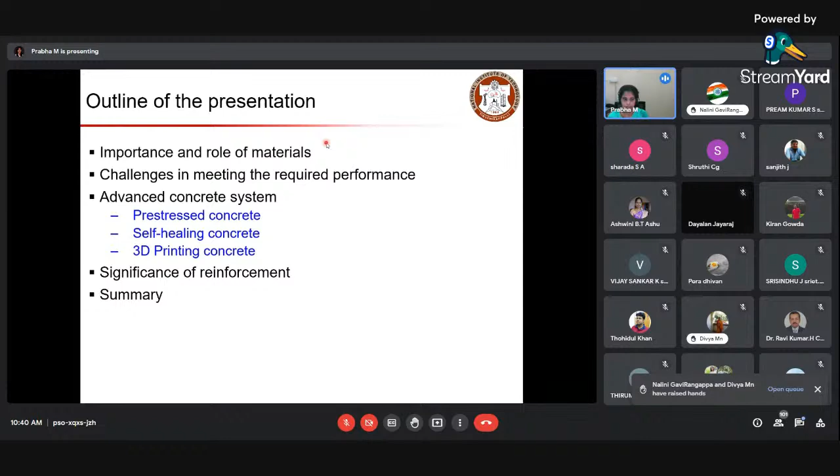Then the significance of reinforcement—how the reinforcement has to be examined, and the importance of the parameters we look for in reinforcement—will be touched, and then the summary of the whole presentation will be given.

In the title slide, I was emphasizing why we need to worry about sustainability, and the role of materials which will help us achieve sustainability.

This summarizes that India is witnessing a huge construction boom. We have a lot of scope for highways, seaports, and airports projects, because we have a huge marine area and sea area, so we need constructions around it. We also have residential and commercial buildings, and urban and rural projects—connecting urban and rural areas is also one of the schemes under this.

So all these things have huge materials involved, and the construction practices that are adapted to enhance the performance of the structure need to be sensitized. We need to keep them safe and usable for longer periods—that basically touches the serviceability of your structure.

We generally construct these structures to serve for 100 plus years. Unfortunately, many structures tend to show early deterioration signs within 10 or 15 years of construction. You might observe some cracks, and if you are not addressing them at the earlier stage, that will cause severe durability issues, which will influence the serviceability of the structure.

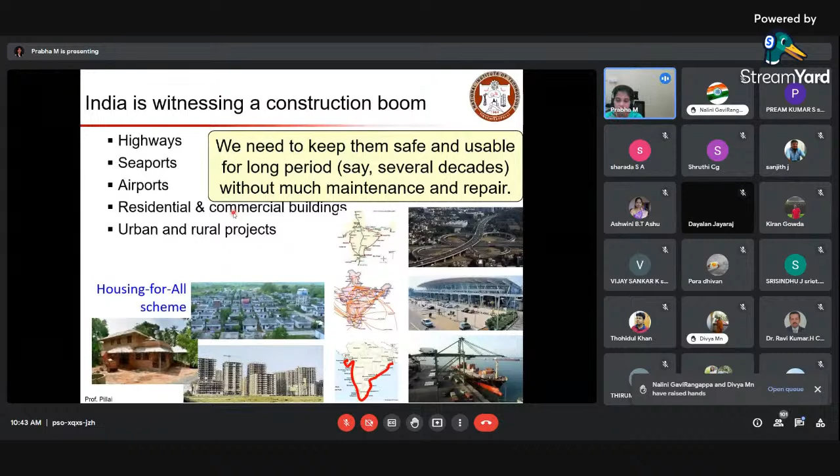That's why whenever we construct structures, we always prefer to do it in such a way that it should not need any maintenance or repair work at frequent cycles.

So what is the scenario today? This data I have sourced from Professor Pillai and Gettu's course content at IIT Madras. It was mentioned that we have surveyed about 1.7 lakh bridges in India, under the program of the Indian Bridge Management System, Ministry of Road Transport and Highways, Government of India. Among that, we found 6,000 bridges are structurally distressed, and many structures are in partially distressed conditions.

But there are a number of bridges which were not accounted for, so this number may become alarmingly high—even more, because the database itself is inadequate and could be incomplete.

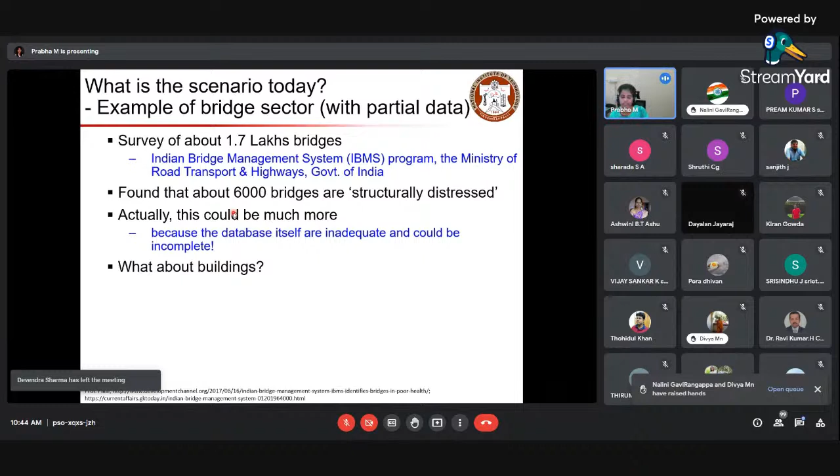If this is the case for bridges, just think about buildings—we really give least importance to the buildings around us. We just construct the building, and after that, unless the owner gives it importance, it will be left as is. So the point to notice is that we have a Herculean task of maintaining existing concrete infrastructure as well as building new ones, with required durability and corrosion resistance in consideration.

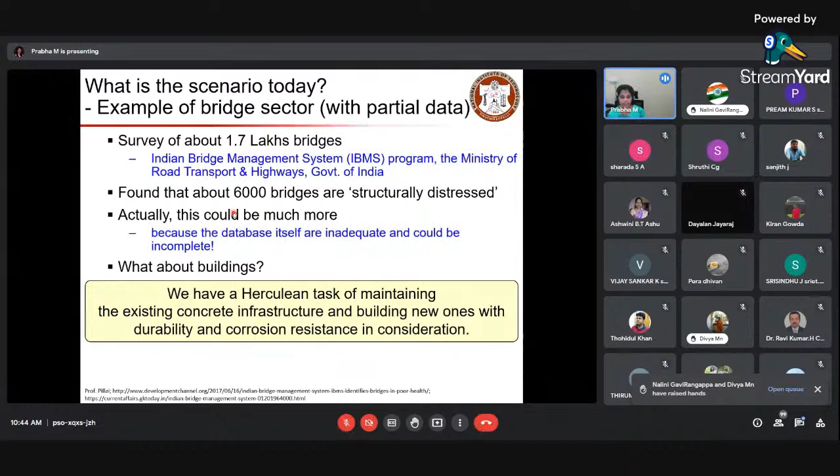Why do I say corrosion resistance? For many durability issues, corrosion plays a huge role in affecting performance. So I'm highlighting here the importance of concrete systems—why do we need to worry about corrosion?

Corrosion consumes a lot of money in concrete structures with steel reinforcement. If you observe a slight crack, that crack allows external or foreign elements to get into the matrix. So if moisture or air increases, that eventually reaches the surface level of the reinforcement. Once the reinforcement is in contact with moisture and air, that reacts and starts initiating corrosion.

So you tend to observe a lot of cracks with stain marks, as you might have observed in many structures. If the crack is there and continues without repair, it goes deeper and deeper to reach the steel surface and starts corroding, and you see a lot of rust formations or stains on the concrete surface.

One report says this costs about 3 to 5 percentage of a nation's GNP in some countries, and it could even be up to 50 percentage of construction budgets. So why do we have such a scenario? Because the existing knowledge is not adequately applied when you do construction work. What we study or theoretically know is not being properly implemented at the construction site.

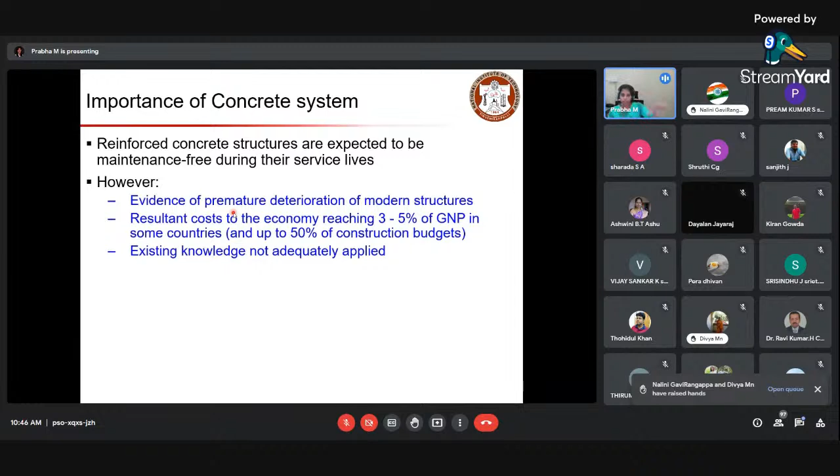So that's why we see this huge gap between what we know about the materials and what actually behaves at the concrete construction site, once the structure is constructed and exposed to various conditions—environmental conditions, loading conditions, or serviceability conditions. Let us look at how different conditions induce problems in reinforced concrete members.

Here you can see a concrete element, and inside you have a rebar. Generally, when we talk about concrete, we divide it into two regions: one is covercrete, the region that protects your steel rebar, and the other is corecrete. Covercrete is responsible for durability, whereas corecrete is responsible for strength.

The purpose of having covercrete is to protect your rebar, and if the quality of covercrete is not adequate, it is not going to serve its purpose. That's why, in general, the code specifies a minimal covercrete depth depending on the environmental condition where your structure is going to be constructed—it could be 25 mm, 30 mm, 40 mm, 50 mm, or even up to 75 mm if the severity is higher.

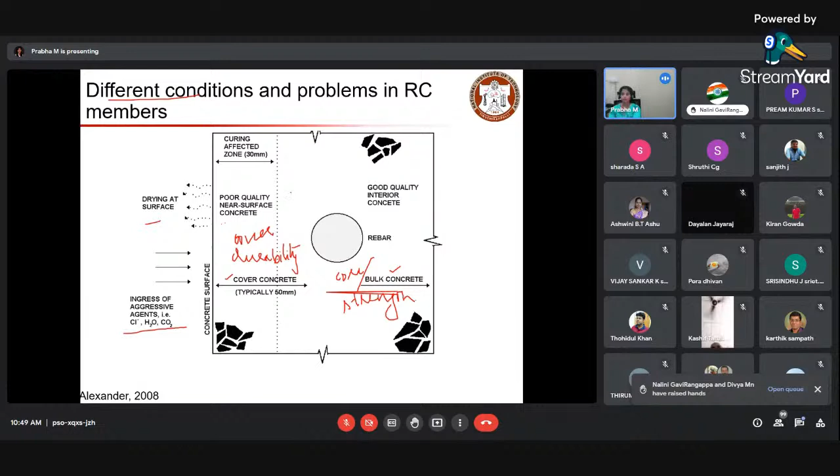So typically you'll have good quality interior concrete, but generally the outer concrete will be of poor nature. So you have to give enough importance to the cover concrete as well to enhance its performance. For sustainable structures, good quality material should be used—the cover concrete should also be of good quality, equal to your corecrete.

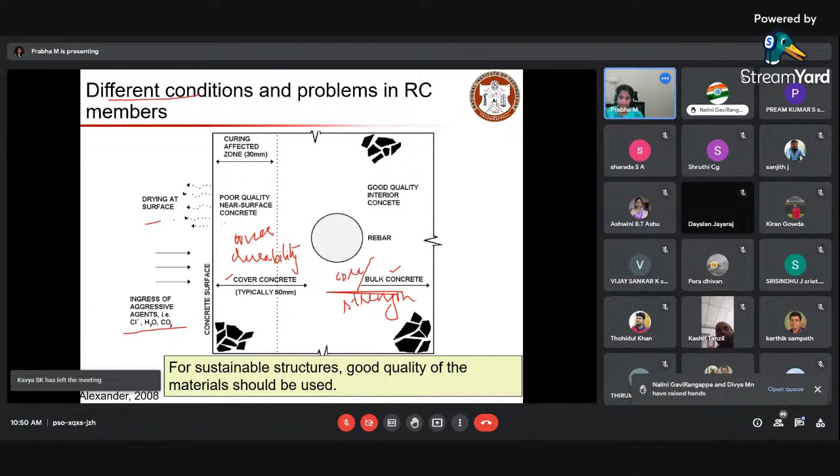So what is the durability that we are talking about? When you have a concrete system, we typically divide concrete systems into two categories: one is about the materials, another is about the process in which it is being made. When you talk about the material, you are aware of how the concrete is prepared. You'll be having a binder type, and some binder content, that could be the cement.

and then it has to be placed.

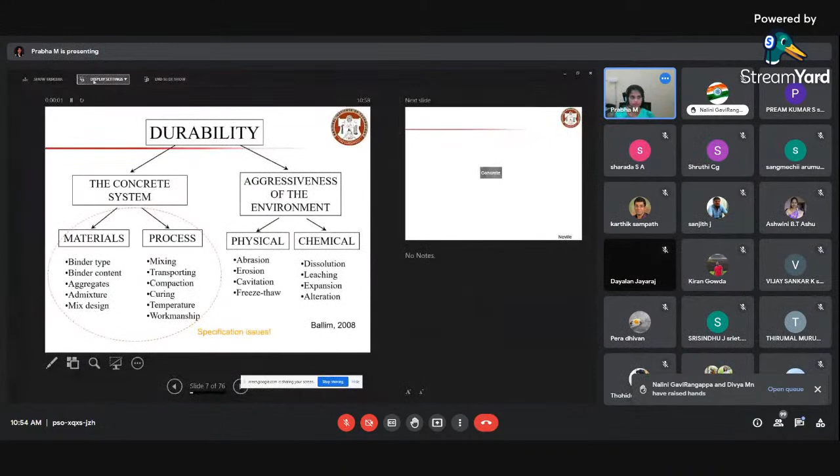So that's all with the concrete systems that we deal with respect to materials or the process. And when we look at the aggressiveness of the environment, we can categorize that into two types: one is with respect to physical attack, another is with respect to chemical attack. When we talk about physical attack, abrasion, erosion, cavitation, or freeze-thaw all influence your concrete. When we talk about chemical attack, this is about what type of chemical is in contact with your concrete and how it reacts with the ingredients in your concrete to lead to damages. This is associated with dissolution, leaching, expansion, alteration.

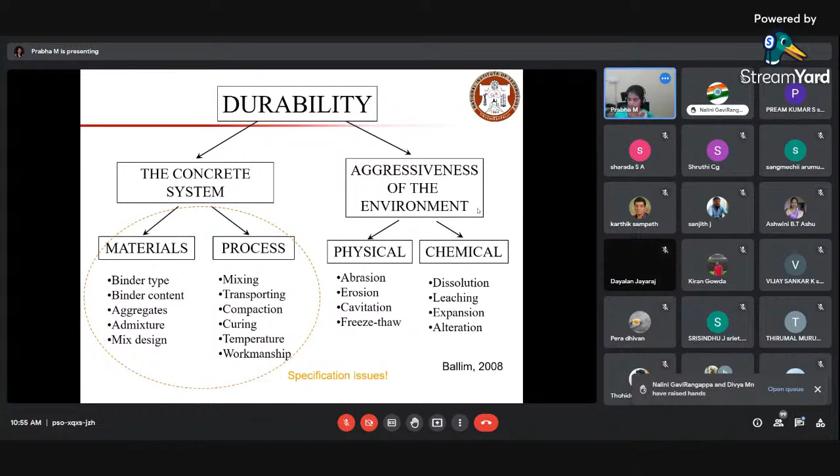Okay, so just to brief in general about concrete systems: you have a concrete, and it's basically a lot of materials combined. It's a highly heterogeneous material. You'll be having cement materials in your concrete, fine aggregates, coarse aggregates, water. So this is not a homogeneous material. You have all the materials put together and bound together by the binder, and thus you'll be having a lot of pores in it. The connected pores are what allow foreign elements to permeate into your concrete.

That is what we call permeability. Permeability basically represents the connectivity between your pores. But you can prepare a concrete without interconnectivity. So the pores can be present in the concrete, but the pore connectivity should not be there. If it is connected, it gives a direct path, so any material can easily penetrate into your concrete.

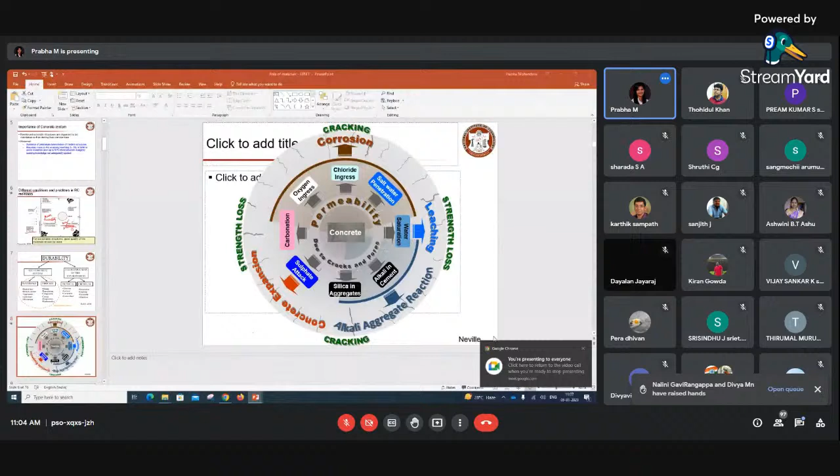So we're talking about concrete, and then the pores and cracks, and how that is going to influence it. You'll be having connected pores that will result in permeability over time. You may observe cracks, and the formation of cracks will further help your pores to get connected.

And if your concrete has good permeability and a lot of cracks and pores, then that is going to eventually allow chloride to ingress, oxygen to ingress, and salt water penetration. You may see carbonation leading to a carbonation reaction, and then water saturation would occur, and that will result in leaching.

In general, your concrete itself has some amount of alkali in cement and silica in aggregates, and depending on the exposure with respect to sulfate environment, if the sulfate already in your concrete is not reacting when it has to react, then over time, especially when you are in steam curing—this is a scenario when the temperature is above 80 degrees Celsius—you are basically suppressing the sulfate reaction in the initial stage, and that is going to react at a later stage and result in delayed ettringite formation.

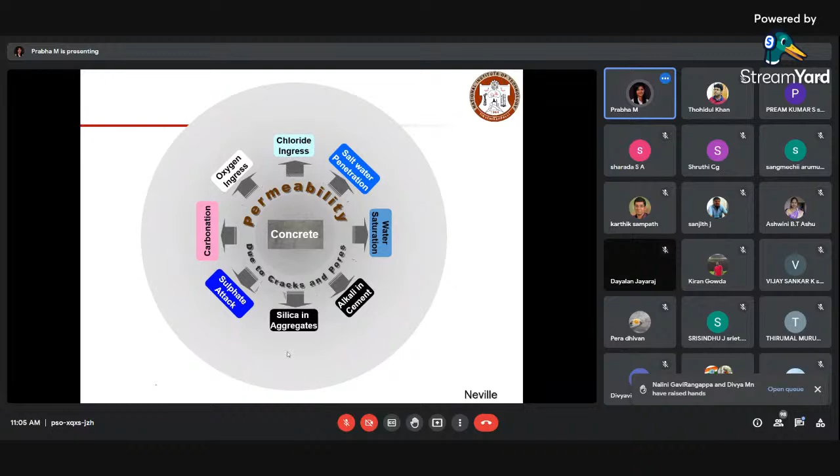So when you have such combinations of oxygen ingress and saltwater penetration, or sometimes even carbonation, that is going to result in corrosion. Or when you have the combination of water, alkali in cement, and silica in aggregate in contact, that is going to result in alkali aggregate reaction.

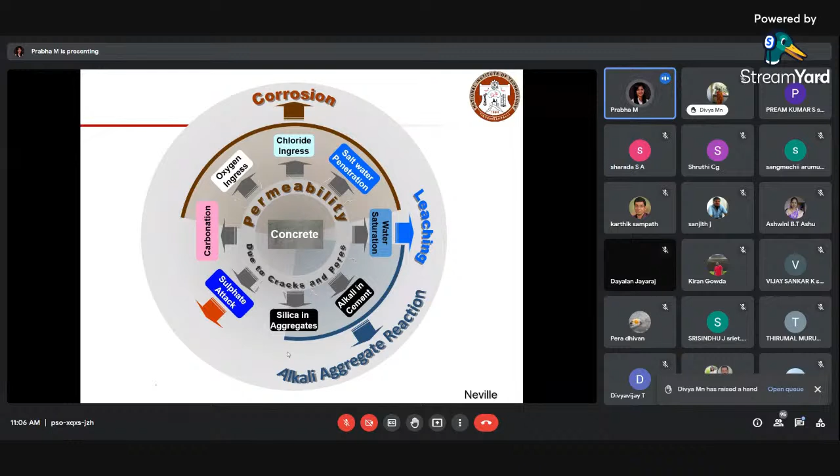And if you have only water saturation, or sometimes these could occur in combination together, you may have leaching, and if you have sulfate attack, that is basically going to result in concrete expansion, and thus going to crack your cover concrete.

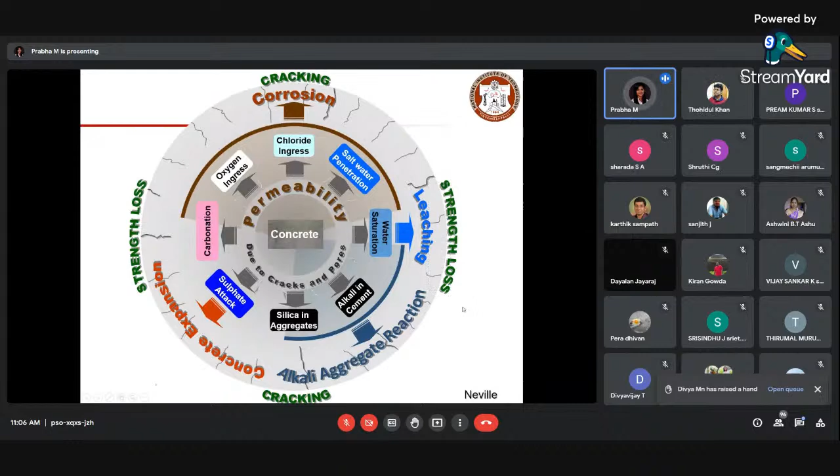So what is going to occur if it is cracking? All this reaction is basically involved with expansion of your concrete material, and that is going to result in cracking, and you may lose the strength that it has to provide. So these are some common observations that we have with respect to the materials in concrete systems.

Then let me talk about the common causes of deterioration of concrete. What are the causes that would result in such a scenario? You may have, as I was telling, sulfate attack, or physical or chemical attacks in the form of abrasion or erosion.

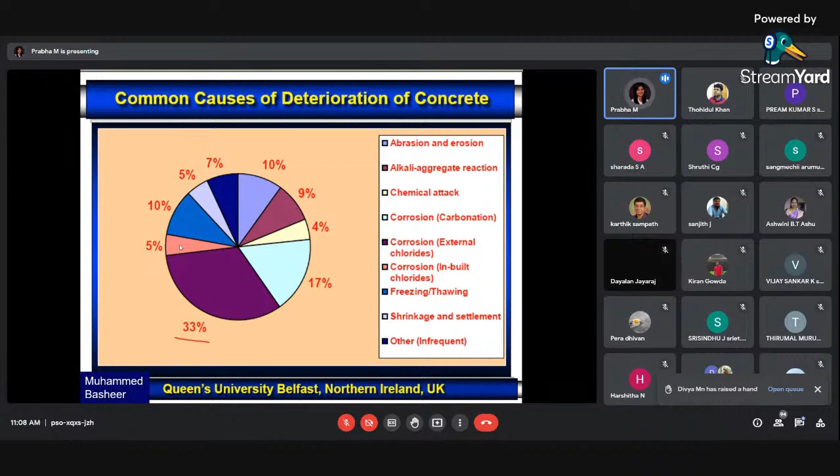The importance of the covercrete—if you're not providing a sufficient amount of covercrete, then that may result in low cover, and you will be having poor quality concrete, which accounts for about 26 percent.

It's significantly high. And then poor design detailing, where the steel reinforcement plays a huge role. Why do we use steel reinforcement? Because your concrete is good in compression but poor in tension. So we place the steel to help your concrete. The steel says, okay, you can stay cool, I can take some tension that is going to come. So that's how they work together.

So that's why we provide steel. But if that steel detailing is not adequate enough and doesn't meet the required purpose, the poor detailing would affect the concrete performance. And then poor workmanship, as I already explained how it is being done in the country.

Wrong specifications, of course. Sometimes the codal practices that we have were developed in the 1960s or 70s, and we still use the same codal practices with updated versions, but there is no much change in the specifications or the methods specified in the code. Why? Because the code specifications developed in the 1960s were meant to meet the requirements for the materials available in that scenario, in that period.

But now we have huge modern construction materials with significantly high strength parameters and other requirements. So in the same scenario, if we still use the specifications developed in the 1960s or 70s, that is not going to help. We may think that could be conservative, but the over-estimation again influences the performance in various aspects.

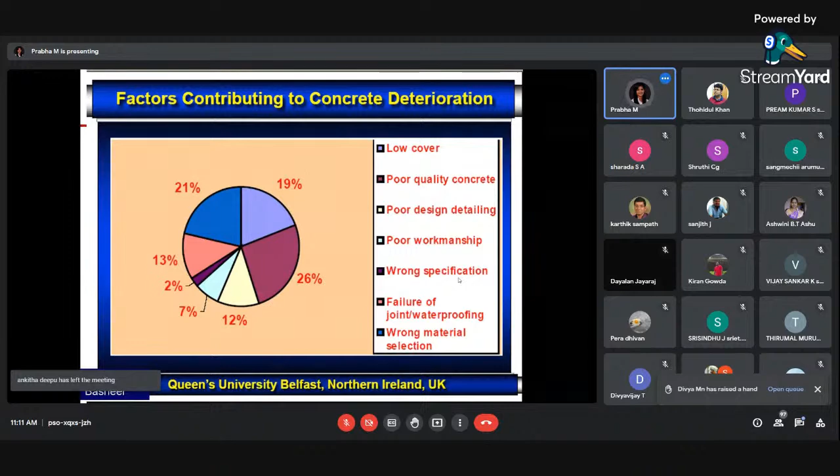Wrong material choice is another issue. If you are asked to select a material, you have to choose it so that it meets the required demand. You need to know the material well, and whether it's adequate for the application or whether there are specifically designed advanced materials for that particular demand. If you use the right one, your design becomes more conservative with less effect. I'll touch upon these aspects as we move on.

This is the basic thing I'll be covering in this presentation. The balanced approach is what we look for, especially to enhance service life. Balanced approach means giving equal importance to steel and concrete, because steel helps take tension and concrete helps take compression. But what protects your steel is the covercrete, and we give the least importance to that. The point is that to protect your steel, you also need to give importance to the covercrete—you need to balance the quality of both, and the importance of both.

So steel with enhanced resistance against corrosion is the main thing to enhance serviceability. Similarly, concrete cover with enhanced resistance against ingress of deleterious elements is the other factor that will balance your synergetic effects to enhance the service life of the structure.

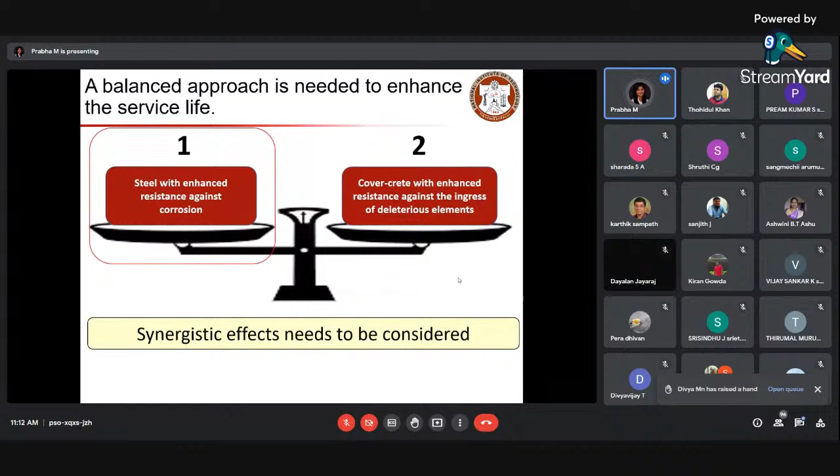So why is concrete a vital material for any construction? You may think of replacements for many things, but we don't have any replacement for concrete till now. Why is it such a vital member for any construction?

To highlight the importance of concrete, I brought a few plots from Zhang et al. He noted that the annual production of concrete is significant tons per year, and the price is also very low compared to other materials like metals, ceramics, or polymers—steel, wood, bricks, and masonry. Your concrete lies somewhere here: production is high, cost is low. We still haven't come up with an alternative that serves the purpose better than concrete, with respect to both performance and cost.

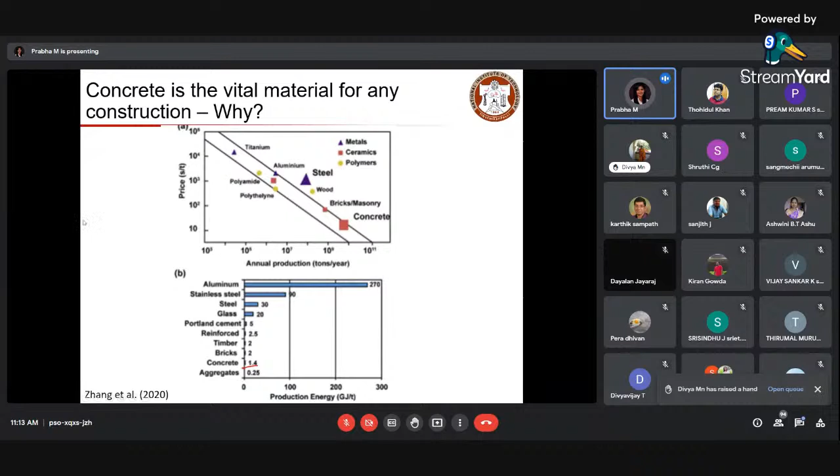Next, consider the energy involved—when we talk about sustainability, we talk about energy. The production energy involved in concrete is also very low compared to other materials. Here you can see the energy involved in various materials ranging from aluminum to aggregates. Concrete comes in around the range of 1.4 gigajoules per ton, so the energy invested in preparing concrete is very low compared to other materials. That's why concrete is such a vital material for any construction.

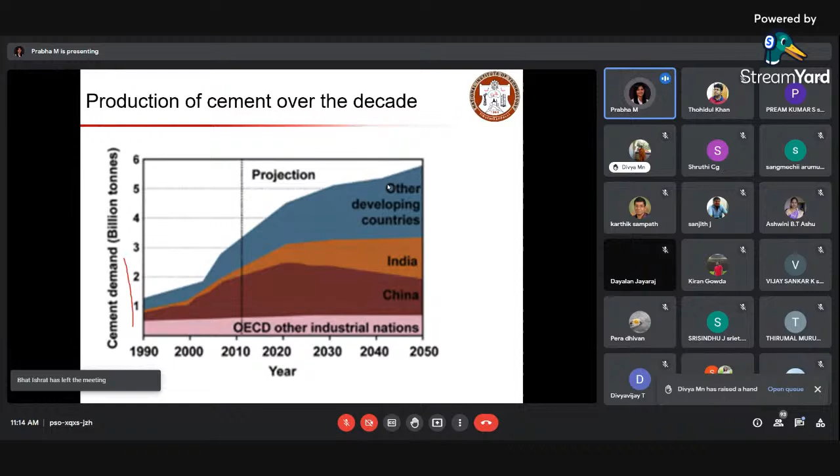This shows how cement production has evolved over the decades, ranging from the 1990s to 2050, with predictions for various countries—especially developed and developing countries—focusing on India and China, which have tremendous infrastructure growth coming. Cement demand in billions of tons is going to be very significantly high in India and China, with the quantity of these two almost equal to or greater than the quantity required in other developing countries combined. This sensitizes us to give more importance to the sustainability aspect. When producing such huge amounts of cement, we also need to find ways to save energy to meet a circular economy.

So concrete is the second highest consumed material. Why? Because it gives the desired properties for good performance in terms of workability. Workability deals with how much water you add for the required strength, and how admixtures can be helpful for enhancing the flowability of your mixture if the water content is less, especially for high strength concrete.

So you may reduce the water content significantly. As the water content reduces, the concrete mix becomes too harsh. So chemical admixtures will help you achieve the flowability.

And then compressive strength. So how do we ensure the compressive strength? By pore volumes. As the pore volume is lesser, you will be having a denser structure, thus resulting in more compressive strength.

And when you talk about durability, that is governed by the connectivity between your pores. If the pores are connected, you will be having less durable material. If the pores are less connected, though the pore volume is more, but if you don't have the connectivity, then you will be achieving good durability.

And then dimensional stability. That is something we look at when you have huge surface area. Why? Because when those concretes are exposed to environmental conditions, the humidity and temperature in the atmosphere will influence the performance in terms of shrinkage and that mechanism. So when the material is exposed in such a way, it should not lose its dimensional stability.

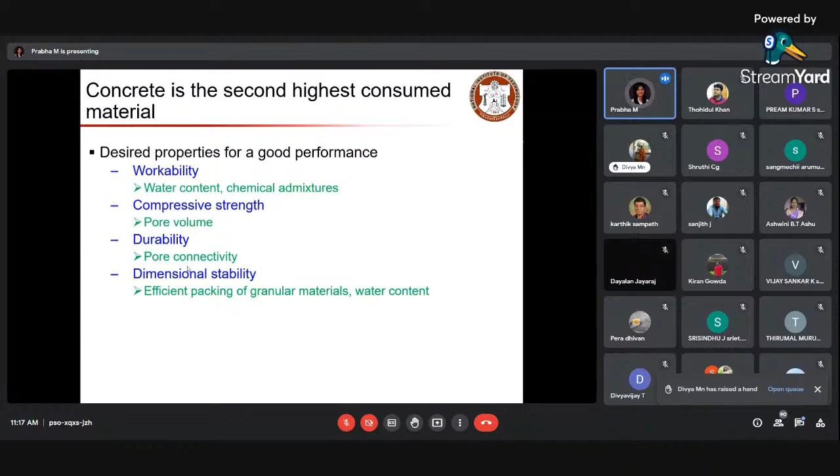So when I talk about typical concrete systems we use in developing infrastructure, we'll have normal concrete, which is normal strength concrete, high performance concrete, ultra high performance concrete, precast concrete, and the latest technologies like self healing concrete and 3D printing concrete.

Why do we have self healing concrete? Because that is in respect to maintenance and repair work. Cracking is inevitable in your concrete. So if it gets cracked, we are making the concrete self sustainable so that it can heal on its own by providing some products that would fill up the cracks that develop, and then it can be healed on its own by filling the cracks.

And then 3D printing concrete - we don't need to wait for the concrete to be mixed and placed and wait for the strength gain. It's all about you pour the material and it will be printed to the required dimensions. So a lot of research is ongoing focusing on these topics.

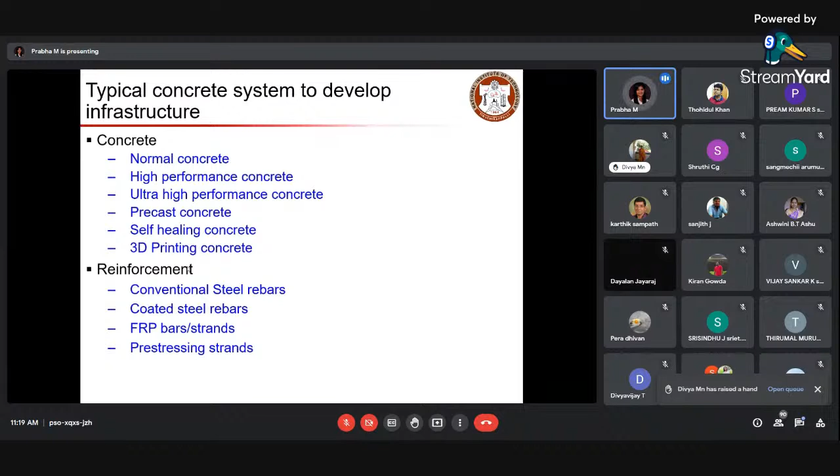And then reinforcement - when we talk about reinforcement, we'll have conventional steel rebars and then coated steel rebars. Then you have FRP bars in strands and pre-stressing strands, right?

So I'm not talking about normal concrete, but about the materials that we use. I'll just directly get into high performance concrete. When we talk about high performance concrete, we'll be using some supplementary cementitious materials which will help us to

enhance the strength as well as the durability. We use such materials to help densely pack the aggregates, so that there is something called pozzolanic reactivity, pozzolanic reaction. These materials in general have some reactive silica or alumina, so that when they get in contact with calcium hydroxide in the presence of water, that produces additional CSH gel. That CSH gel will help enhance the strength, and that product will help fill up the additional pores. And the fine materials of these SCMs will also act as fillers

so that your matrix will be much denser. That's why the dense packing of aggregates will be achieved, and low water cement ratio can be used for meeting the high performance concrete requirements, and proper curing needs to be done. Proper curing is needed to avoid early cracking due to shrinkage and thermal stresses.

Here you can see various types of SCMs listed: fly ash, GGBS, rice husk ash, silica fume, metakaolin, and fine POFA material.

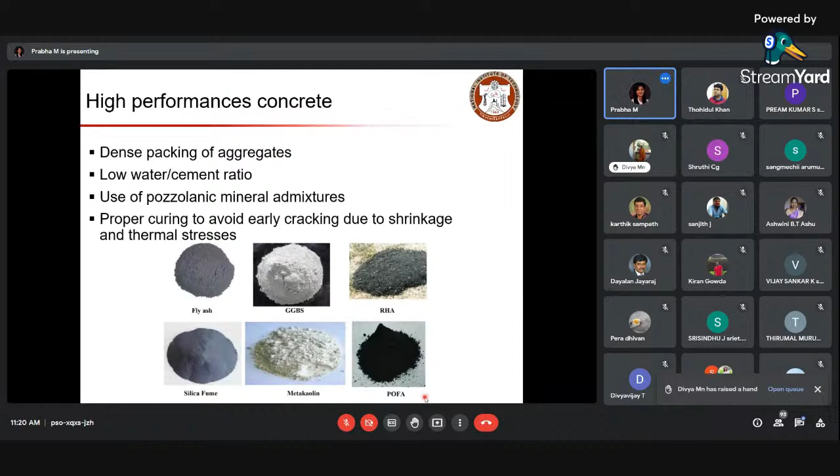When you talk about ultra high performance concrete, here you are limiting the coarse aggregate, so coarse aggregate will be very less. The size of the coarse aggregate is limited, so it becomes too fine a material.

So ultra high performance concrete is defined as a cementitious based composite material with discontinuous fiber reinforcement, and generally the compressive strength of the material will be above 120 MPa, and it will have pre and post cracking tensile strength of above 10 MPa, and this will also help enhance the durability. You can see some steel fibers used for this purpose.

You can see the ultra high performance concrete shown here. You will be having some cement and pozzolans, and you can have some fine aggregates, fine sand, ground quartz and fibers. High range water reducer is required because you're talking about 120 MPa, that means the water cement ratio will be very less, and you'll have some fibers also.

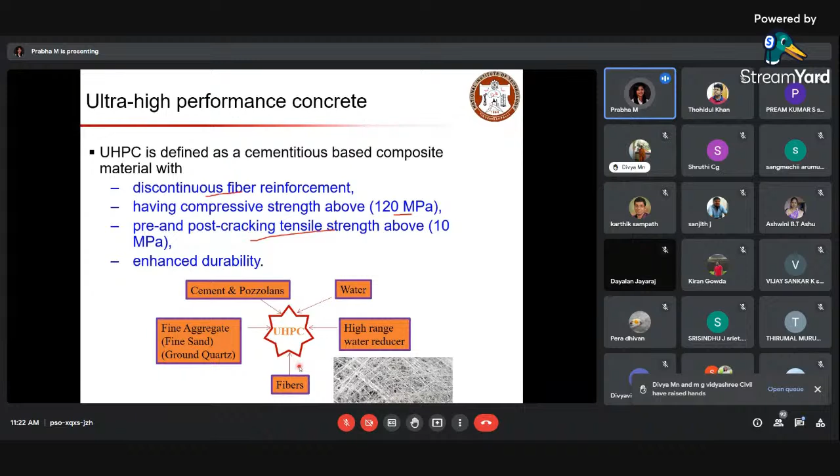So in case if there is any cracking, these fibers will help enhance the toughness of the material. Why? When we go with this 120 MPa strength, basically you are making a material which is very brittle. So when you have brittle material, the failure will be sudden. To enhance the toughness or the energy absorption of the material before it fails, we will be adding some amount of fibers. That's why we use fibers to enhance its durability.

When you talk about the performance of ultra high performance concrete, you can see this is a control mix, and you have a high performance concrete in the range of 80 MPa, and this is about 200 MPa. The compressive strength is significantly high for this RPC, basically indicating reactive powder concrete, which is one form of this ultra high performance concrete.

The fracture toughness is also significantly high. When we check the application of this high performance concrete for abrasive wear, because it has very good strength and toughness, the abrasive wear will be about 2.5 times lower than conventional concrete. And water absorption, because these are finer materials, the pores will be very less and you have a denser matrix, so the water absorption will be 7 times lower, and rate of corrosion will be 8 times lower, and chloride ion diffusion will be about 25 times lower than conventional concrete.

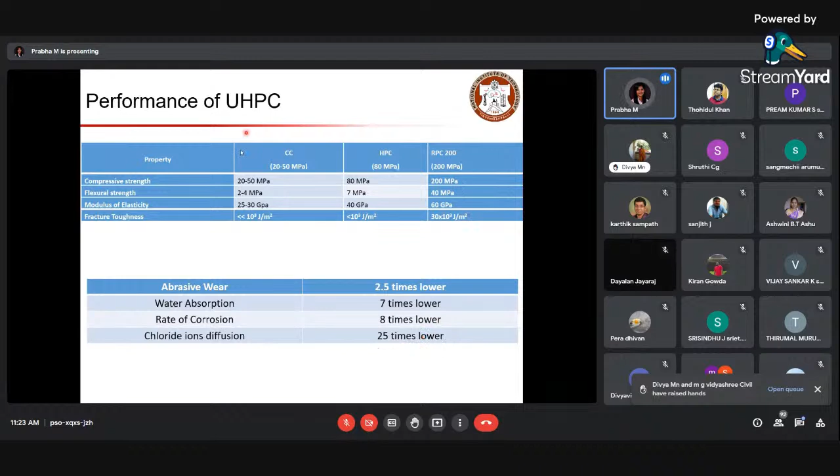When we work with fiber reinforced concrete, we check how much the material can absorb before it fails, because concrete is a quasi brittle material. It cannot absorb as much energy before failure as steel. Steel tends to bend and deform, but as the strength of concrete increases, it becomes too brittle, like glass, and failure will occur suddenly. We don't want sudden failure, so we add fibers to enhance the toughness of the material.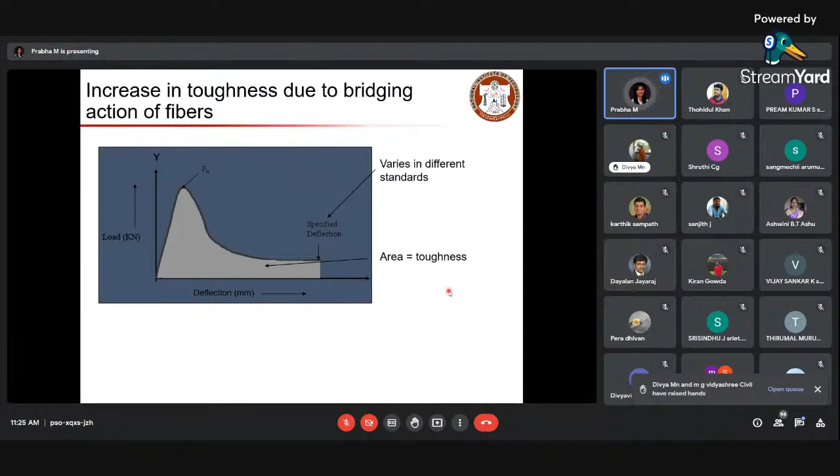And then we have self healing concrete. As the name indicates, it's a self-repairing concrete, a concrete composite with the ability to repair small cracks automatically without any external intervention.

How does this mechanism occur? It is autogeneous healing, through further hydration of unhydrated cement in the concrete. The concrete has cement, moisture, and aggregates. When we have concrete, it doesn't mean all the cement has hydrated - there will be some unhydrated cement present.

That unhydrated cement could get accessible as a crack occurs. If it gets in contact with moisture or some triggering agent, it reacts and produces additional CSH to fill up the cracks. So hydration of unhydrated cement in concrete helps achieve healing.

Mineral admixtures, fibers, nanofillers, and curing agents are such helping agents for you to achieve this autogeneous healing.

The second one is autonomous healing - a trigger that is required to activate this process. For autogeneous healing, you don't need to do anything; as long as you have a mineral admixture, fibers, or curing agents, once it cracks, that reacts and fills up the gap.

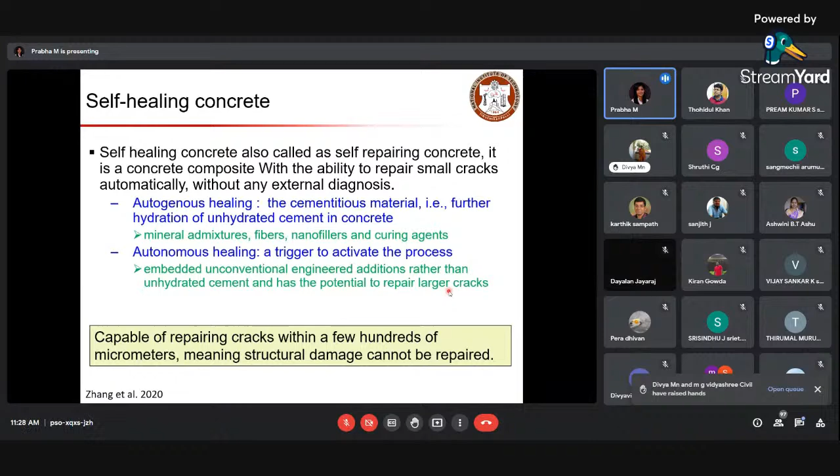Especially issues related to durability, exposure conditions, and so on. If you have structural damage with huge or wide cracks, this is not going to help you. As long as the crack width is minimal and narrow, this kind of material will help prevent such cracks from growing further and enhance resistance to crack width propagation.

Here you can see the mechanism of autogeneous healing. You have a concrete structure with a crack - this could be a physical cause like swelling, a chemical cause like continued hydration or calcium carbonate formation, or mechanical causes where you have fine particles and broken pieces, as you can see here in the water.

These broken pieces result from mechanical causes, and then chemical causes continue the hydration, leading to swelling, which helps bridge or fill the gap.

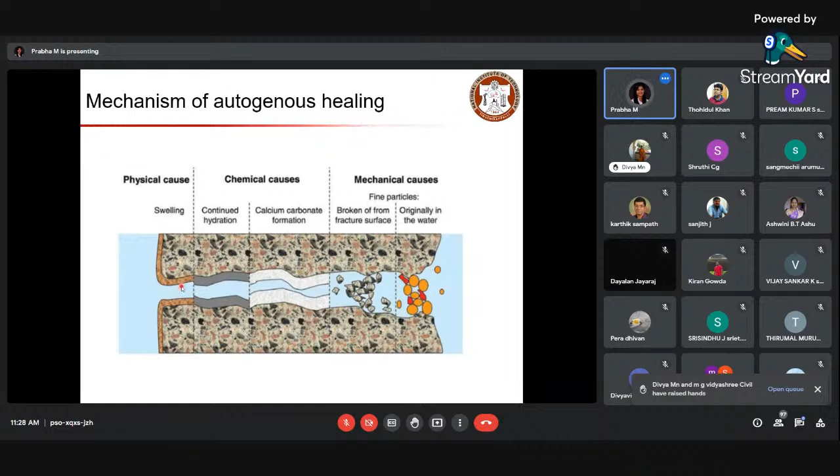Here you can see the performance of healing materials in self-healing concrete. You have a concrete with mineral admixtures, and here you can see the crack after damage is induced.

Now you have expansive agents to fill up the gaps in the form of geomaterials that will swell and fill the gaps, or carbonate precipitates. When water fills this, the carbonate precipitates will fill the cracks. So after filling, the expansive gel agents, geomaterials, and carbonates eventually fill the cracks. Here they've started to react, and you can see the filled cracks.

Looking at the images in longitudinal view, you can see damaged ECC with crack widths less than 60 micrometers, all healed by the healing products, which filled the gaps or cracks when exposed to water or air.

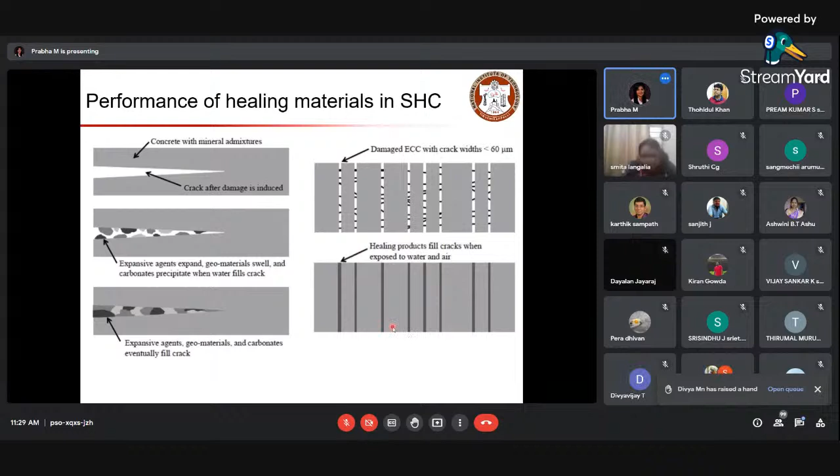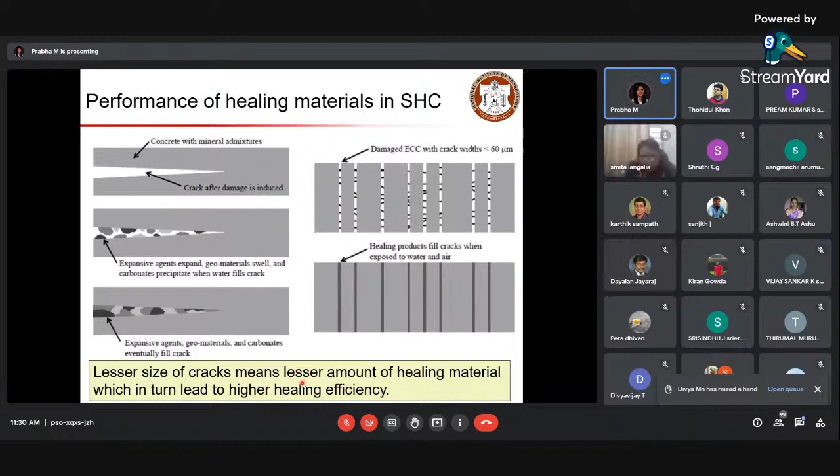So lesser size of cracks means lesser amount of healing materials, which leads to higher healing efficiency. That's why this is not appropriate for structural cracks. If the crack width is in the initial stage, this type of material will help enhance the performance at the early stage of your structure itself.

Next we have something called 3D printing concrete. I don't know how many of you know about Tvasta. It's a startup by IIT Madras, under the IIT Madras company. They are doing enormous work on 3D printing concrete, and recently they inaugurated a 3D printing tower constructed by them.

This technology was all developed in the 1980s. Stereolithography and fused deposition prevailed over the 1980s, but was not popular for the construction industry. This was developed for stereolithography, and in the medical field they started using it. The pioneering work by Khoshnevis et al., called contour crafting, revealed the potential of additive manufacturing technology in the construction field in the late 1990s, early 2000s.

The most popular method is extrusion-based 3D printing, where cementitious materials are deposited as continuous filament layers through a nozzle. You have a nozzle with all the cementitious composite in it, and then you just print it. That's how it was started.

In 2014, Winsun, a Chinese construction company, printed two-story buildings successfully. Then it got attention across the globe, and a lot of research groups started working on it.

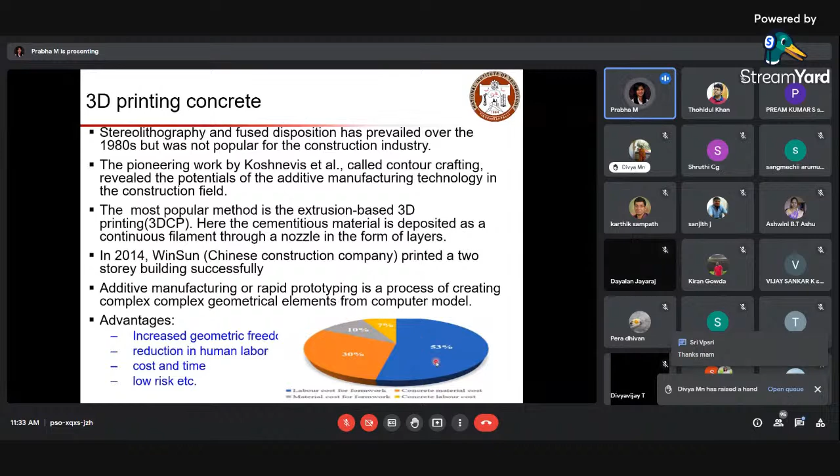So you can see the amount of cost we invest in labor, material cost, concrete material cost, and concrete labor cost. About 53 plus 7, or about 60 percent, is labor cost, and the rest 40 percent is concrete and material cost for the formwork. The material cost for the formwork is about 10 percent. So we can cut down the price significantly, up to 70%, when we go with 3D printing concrete.

How does it work — the material behavior? When you look at the material behavior, you basically work with the rheological property of the concrete. Your concrete has to be as flowable as possible, but once placed, it should have stability. Care should be given so the flowability stays as it is, with proper stability once placed in position.

Research has shown a correlation between pumping behavior and rheological properties through the Kaplan model. The pumping behavior of concrete also depends on the discharge rate — at what rate you discharge your material from the nozzle to print the required shape — and the pipe diameter and length of the pipe hose. These all govern the stability of the process.

But once the fresh concrete reaches the nozzle head, it contracts due to the nozzle's shape and size, and then a layer is deposited one after another over the previous one until the desired shape occurs.

So it is not a complete shape in one go. It is like you will be moving layer by layer. I will show an image of such 3D printed concrete structures to show how it looks, and then you need to do some surface finishing to enhance its aesthetic look further.

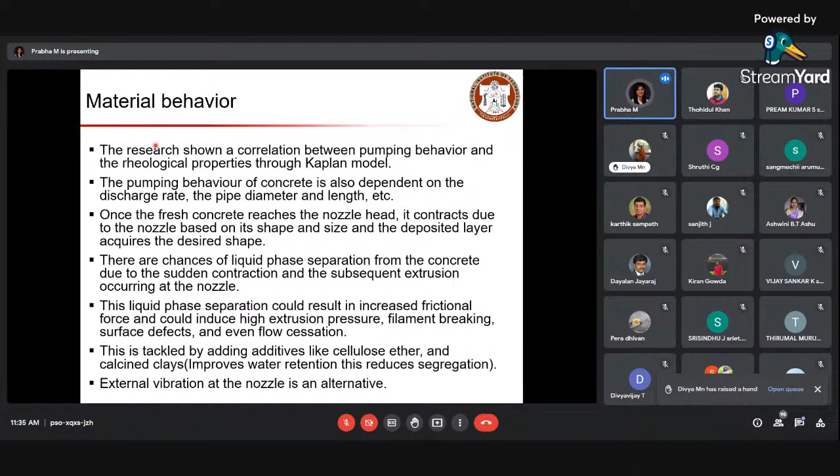You need to look at the importance of yield stress and viscosity, which should be low during pumping, while immediately after deposition the yield stress should be of higher magnitude. So it is a paradox - while pumping, yield stress and viscosity have to be lower so it can be easily moved or placed, but after placing, the same properties should be enhanced so it can maintain its stability. This is achieved by additives and nozzles which can cause an increase in yield.

So what do you do? In the pump, you make the material have lower yield stress, and when it is coming out from the nozzle, you add additives which help increase the yield stress and elastic modulus. You can also have accelerators like calcium sulfoaluminate cement, and thixotropic agents like nanoclay, which may increase the rate of structural buildup through an increase in the flocculation of cement grains. These additives help enhance the rate of structural buildup, which helps increase the buildability or placement of your layers.

The most common method for assessing extrudability is based on printing a filament layer of a given length and then visually examining for signs of blockage, tears, or discontinuity. This means you'll have layers placed one over the other, and you visually examine that the layers are being placed properly, or if there are any signs of tears or damage while it is being placed.

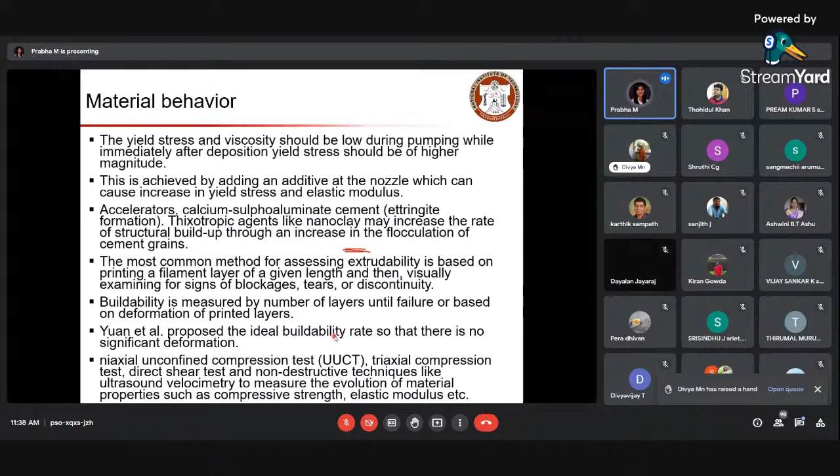So overall, this is a promising technology for the future, and it helps you achieve any dimensional requirements, and it helps you cut down the construction cost by 30 percentage when it is being successfully implemented. So that's all with the concrete.

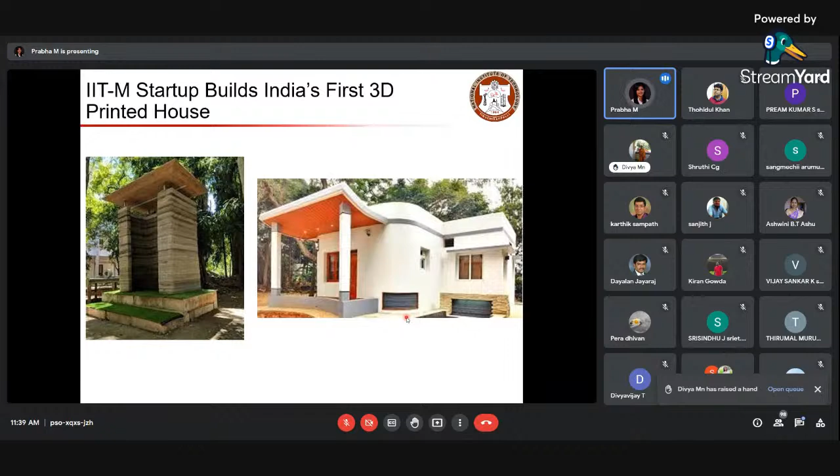I'll just quickly touch upon the aspects we look for in the reinforcement. When we talk about reinforcement, we mostly deal with TMT bars. Initially we were working with mild steel, and then we evolved to CTD bars because the strength offered by mild steel, Fe 250, is not adequate, so we raised our bar to CTD bars where you can enhance the yield stress beyond 450 or 500.

But later we observed that CTD bars are not adequate enough for meeting the durability performance, because CTD bar, as the name indicates, has twisted bars, and that will have high reactivity, and when it gets a chance, it reacts faster and results in early corrosion. That's why nowadays we don't have CTD bars as common as TMT bars.

So the name indicates it is being thermomechanically treated, or you can say quenched and self-tempered, QST bars. You can see here the process of TMT bar manufacturing. The surface will be ferrite, sorry, the surface will become martensite and core will be austenite. Once it is taken to the quenching box, initially the temperature will be very high, in the range of about 1000 degrees Celsius, and it will be quenched. So when it is quenched, the outer surface becomes martensite, while the inner surface remains in austenite mode.

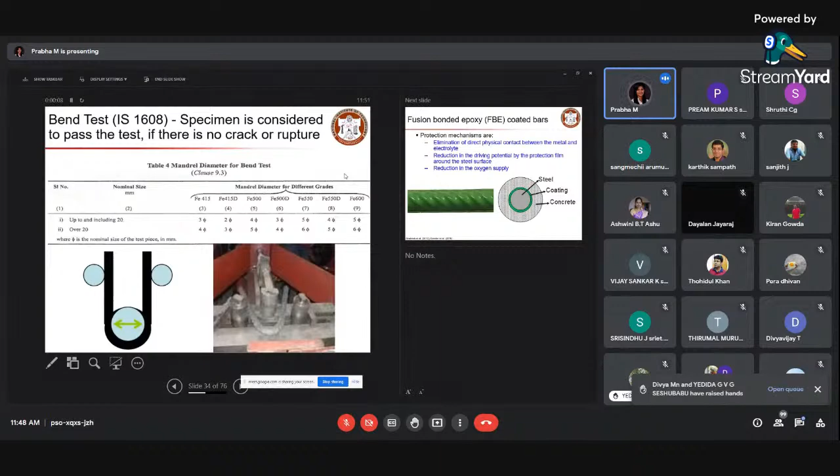So here you can see the bend test, specified by IS 1608. You have a mandrel diameter to bend your rebar and see where it is going to crack or not.

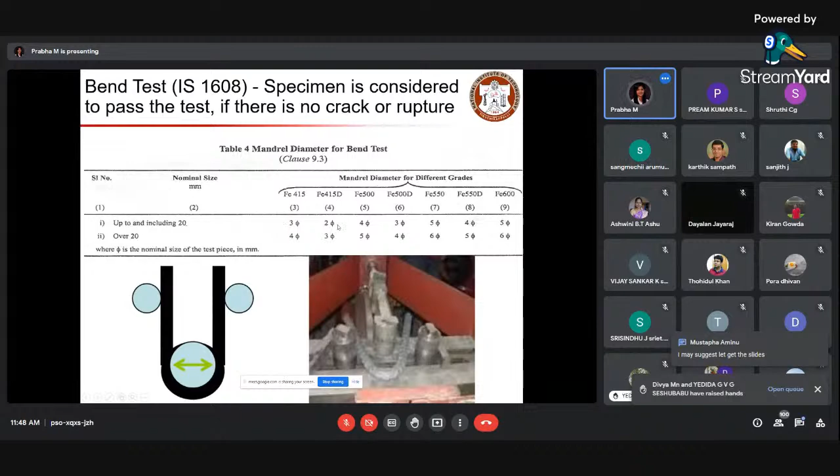That is with respect to conventional reinforcement. To enhance the corrosion properties, we also have fusion bonded epoxy coated bars. As the name indicates, epoxy will be coated on top of your steel rebar, and when you place the rebar in the concrete, this is how it looks - you have your steel, then the coating, and then your surrounding concrete material.

So what is the protection mechanism here? The assumption is that when you coat your steel, you're eliminating the direct contact between the metal and the electrolyte. The coating reduces the driving potential that induces corrosion, and it reduces the oxygen supply also. But if the coating is not done properly, the scenario is going to worsen.

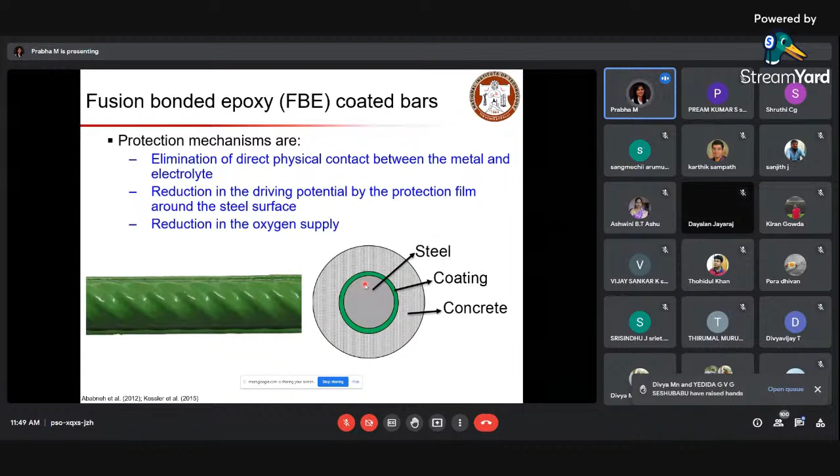You can see the process of FBE coated rebars. First you have the plain rebars, which are surface cleaned, then you prepare the surface for epoxy coating. The epoxy resin powder is placed on the steel surface, then you water quench it, resulting in thermosetting polymers. Then you inspect for holidays or damages, and allow the material to go.

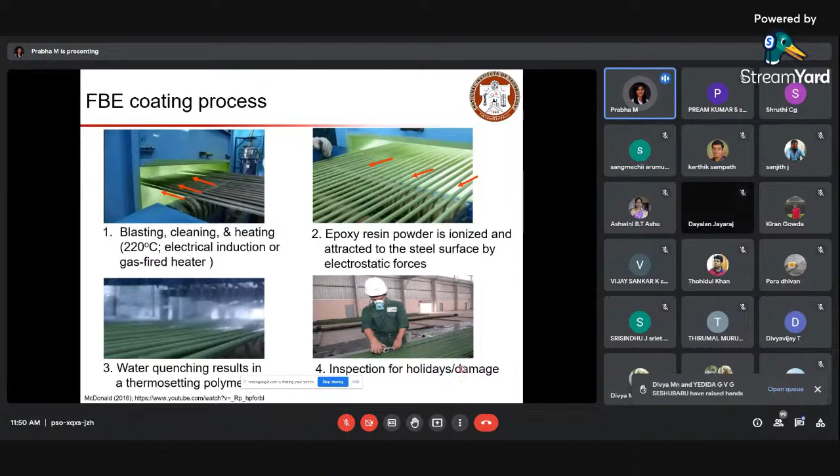So what are holidays and pinholes? If the coating is not done properly, and there are pinholes present, that is what we call a holiday. We check with wet sponges and wires to see whether your material has pinholes or holidays.

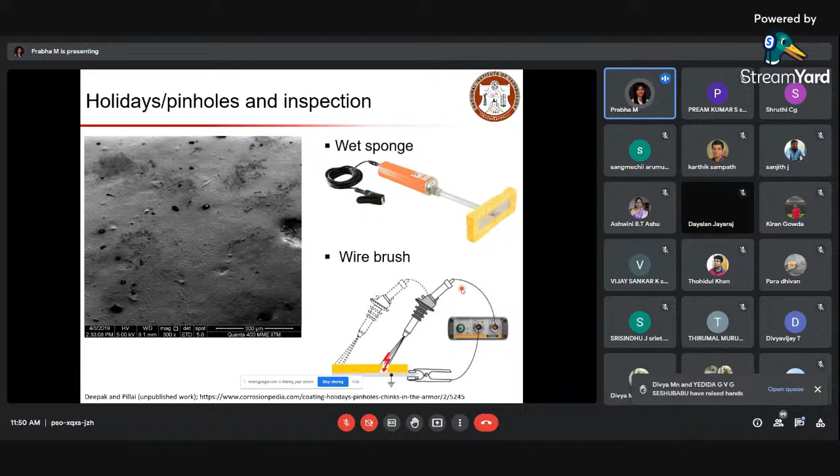You can see here it will get in, and that indicates the issue - the potential will also be higher when you have pinholes, resulting in a higher corrosion rate compared to your conventional concrete.

So the additional insight, how do we do it? Typically, when dealing with epoxy coated rebars, once coated, it should not be bent. But unfortunately, at these sites, they bend it for preparing stirrups. So in other developed countries, how do they do it?

They bend the bars first if the piece has to be used as a stirrup, and then they coat it, so that the coating will not be damaged when it has to be used as a stirrup. So the rebar should not be cut at the site, nor should it be bent at the site.

Even if it is cut or bent, you could just pour additional coating to fix it, but this is not going to serve the purpose, and it will worsen. As the thickness increases, the coating efficiency becomes less, and that may deteriorate, leading to other damages.

You can see here the fusion bonding will not occur at ambient temperature conditions, and this should not be cut at the site - it has to be thoroughly checked for any surface damages.

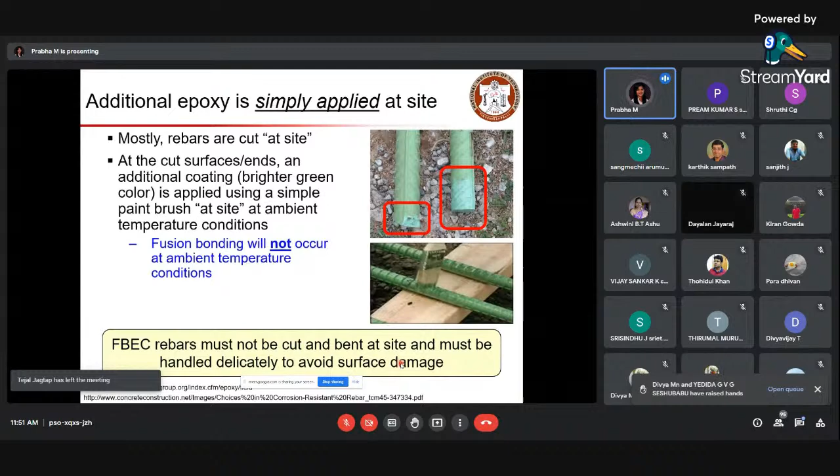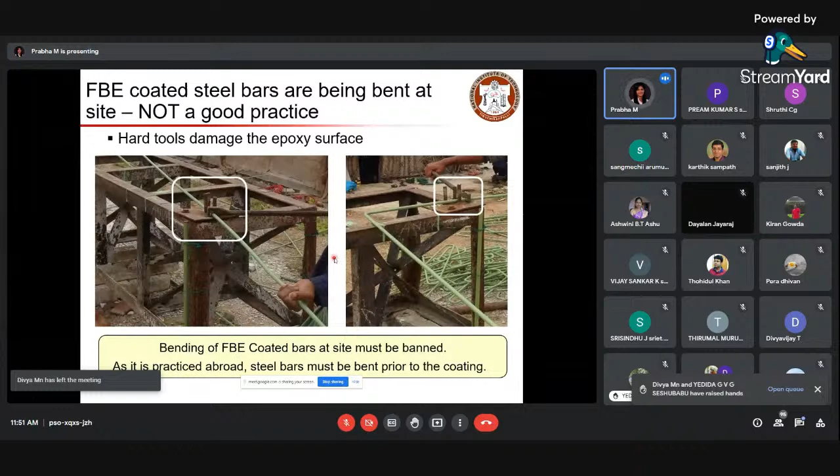Here is an example where you can see such rebars being cut and bent at the site, and while it is being done, the coating gets damaged. You can see here the coating got damaged, and a lot of cracks were observed on top of the coating.

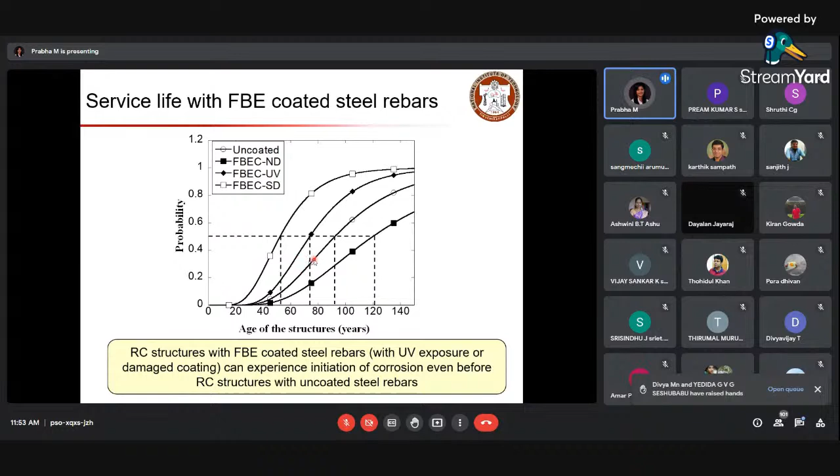This will help enhance the service life of about 120 years. Whereas if you look at the ultraviolet or surface damage case, the probability of failure is very high compared to your conventional concrete systems. So if you take good care of the coating, this technology will be helpful to enhance the service life. If not, this will worsen the performance of your structure by increasing the probability of failure, thus reducing the serviceability of your structure.

You can see the premature corrosion observed in such cases due to moisture attack, without even chlorides. You can see there is no coating at all. The coating has come out, and you can see how severe the corrosion is at this place. So it is more dangerous to use damaged epoxy coated steel than conventional uncoated steel.

So the saying goes that if you can give proper care, go with it. If not, then it is better to go with the uncoated bars than using the coated bars.

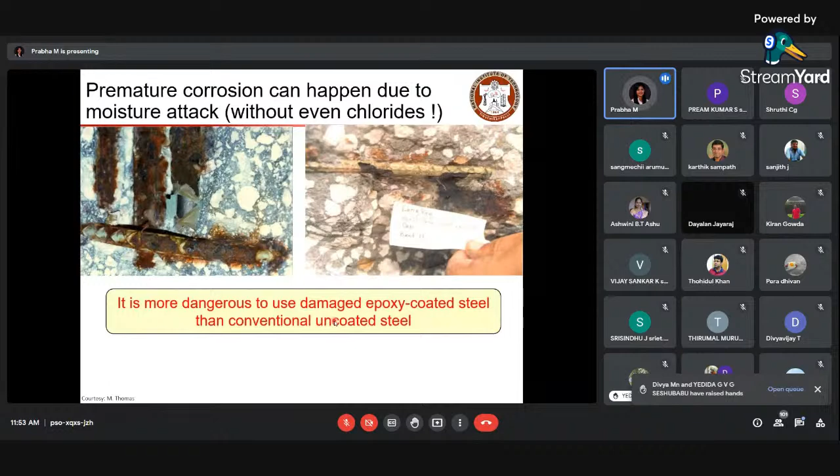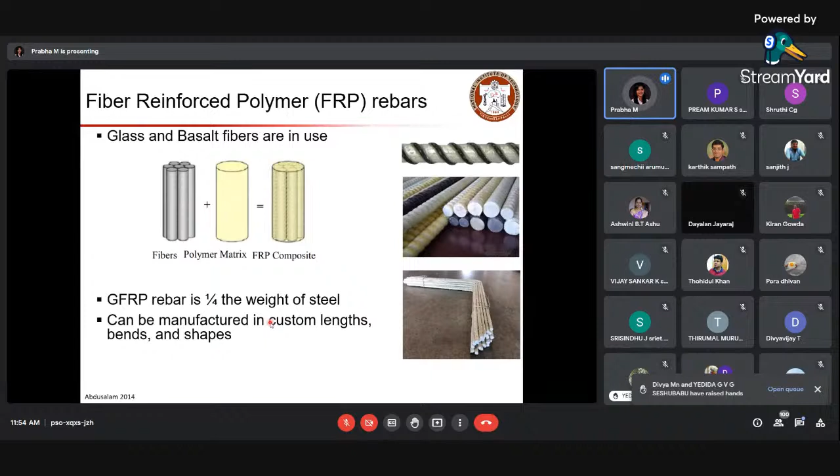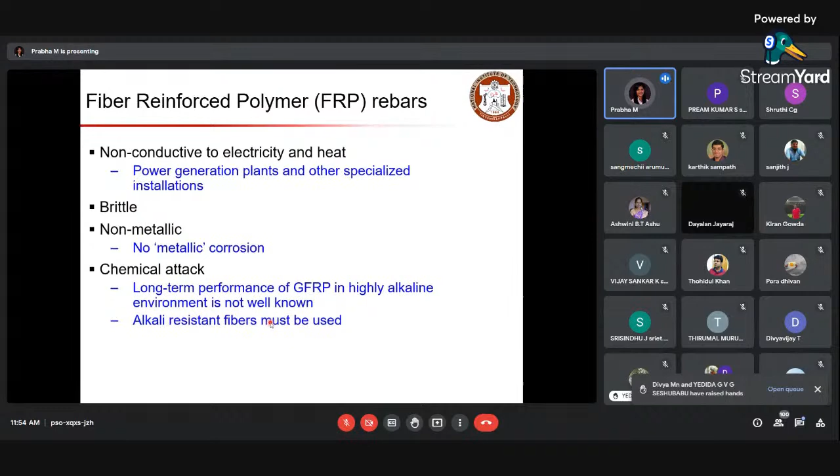Why? Because when you use such materials, that will help you to reduce the maintenance work or repair work that needs to be done in future conditions. Whereas other materials may lead to a lot of repair work in between, which will result in higher life cycle cost. So depending on the importance of the structure, you choose a material. Though it gives a high initial cost, this will help you reduce the overall life cycle cost of your structures, looking at it from a sustainability point of view.

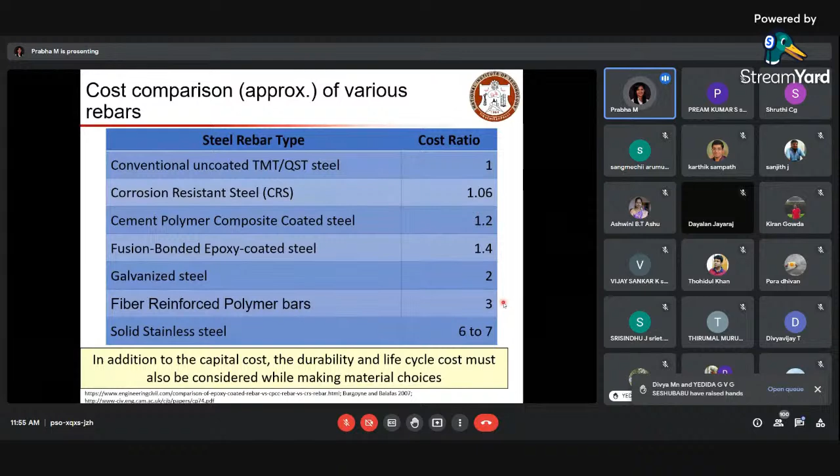All right, I'm just stopping it here, and I'll have discussion for the next 5 minutes. I also have some couple of things about pre-tension concrete systems, but I'm not going to touch that as we are limited on time, and we are done.

So I hope the information is useful for you to connect the details that you already know with respect to the materials aspect, how it will help you to achieve the structural properties, structural performance, looking at the serviceability of your structure.